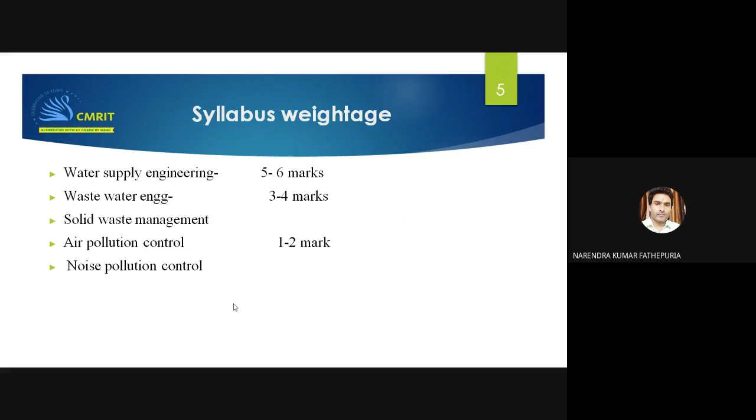As far as our environmental engineering syllabus is concerned, we will be having water supply engineering containing 5 to 6 marks, wastewater engineering 3 to 4 marks, solid waste management, air pollution control, and noise pollution control will contain 1 to 2 marks.

Okay, this is your environmental engineering syllabus. Water and wastewater quality treatment, basics of water quality standards, physical, chemical, biological parameters. In the last series, we discussed the physical, chemical, and biological characteristics of water and wastewater, and that portion we completed last time. We have also done the basic water treatment plants or unit operations. So I will now be moving to the unit operations and treatment part mainly.

So your pollution parts and municipal solid waste part doesn't have that much weightage, but 1 to 2 marks question they can ask. So this I will talk about later.

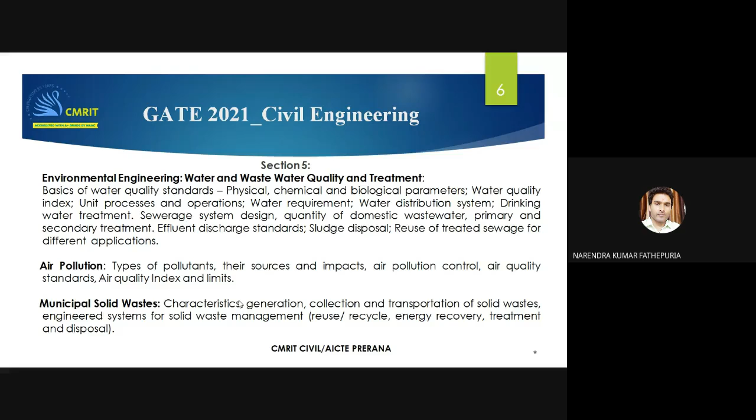In the last lectures, if you have seen the PPT, we completed the biological characteristics in which biochemical oxygen demand we wound up last time. I'll just quickly go over BOD because some portion is remaining, then we'll move to our treatment part.

Dissolved oxygen in wastewater for the oxidation of both inorganic and organic matters - demand of oxygen is expressed in two ways, sometimes total organic carbons, biochemical oxygen demand and chemical oxygen demand. And the third one is the total oxygen demand also.

BOD is the measure of the oxygen required to oxidize the organic matter present in a sample through the action of microorganisms contained in a sample of wastewater - the most widely used parameter of organic pollution for both surface and wastewater. So the strength of the sewage will be defined through the BOD only. We can say it's the oxygen required for the microorganism to carry out the biological decomposition of dissolved solids or organic matter in the wastewater under aerobic conditions at a standard temperature.

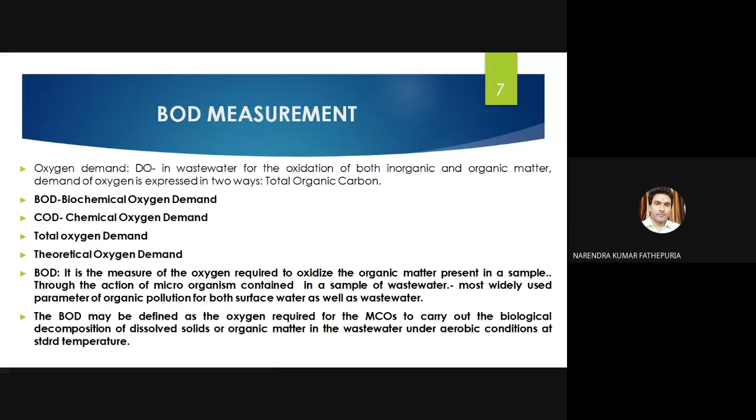The BOD test that we do in laboratory has the unit mg per liter, ppm. The test for biochemical oxygen demand is a procedure that measures the oxygen consumed by bacteria from the decomposition of organic matter. If I'm talking about BOD, we are talking about only the organic matter decomposition - how much oxygen is required to decompose the organic matter completely in an incubation period of 5 days and 20 degrees Celsius temperature. That demand is called BOD.

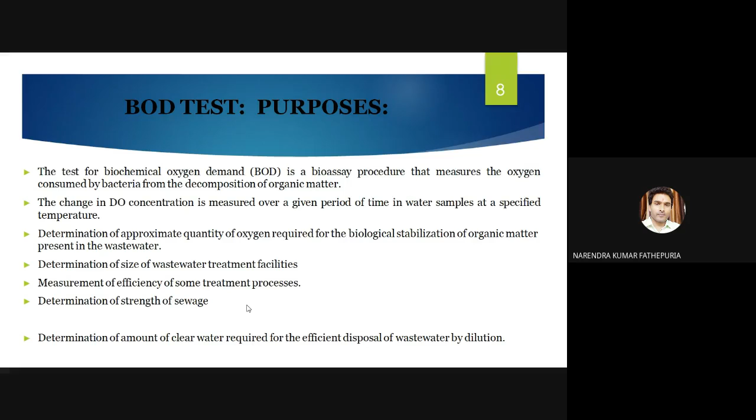Change in DO concentration is measured over a given period of time in a water sample at a specified temperature, to determine the approximate quantity of oxygen required for the biological stabilization of organic matter present in the wastewater. These are the main purposes for the BOD test: determination of the size of wastewater treatment facilities, measurement of efficiency of treatment processes, determination of the strength of sewage, and determination of the amount of clear water required for efficient disposal of wastewater by dilution.

So there is the first stage BOD demand and second stage BOD demand. Decomposition of organic matter takes place in two stages actually. In the first stage demand, only the carbonaceous matter will decompose, biodegrade. In the second stage demand, the nitrogenous matter undergoes nitrification. So we can say there is carbonaceous matter as well as nitrogenous matter present as organic matter in wastewater - first the carbonaceous matter decomposes, and then the nitrogenous matter decomposes.

That's why we call it first stage demand as well as second stage demand. There are some tests for it. The test consists of keeping the sample of wastewater in contact with a definite air or oxygen in a specially prepared vessel. BOD is then measured manometrically.

If you have done a BOD test in your environmental engineering laboratory, they check the 5 days dissolved oxygen content. They put a sample for 5 days in an incubator at 20 degrees Celsius temperature, then take out the sample and measure the dissolved oxygen. So dissolved oxygen after 5 days and dissolved oxygen initially, what is the difference, multiply with the dilution factor. Dilution factor: how much sample you dilute with distilled water. This is called the dilution factor.

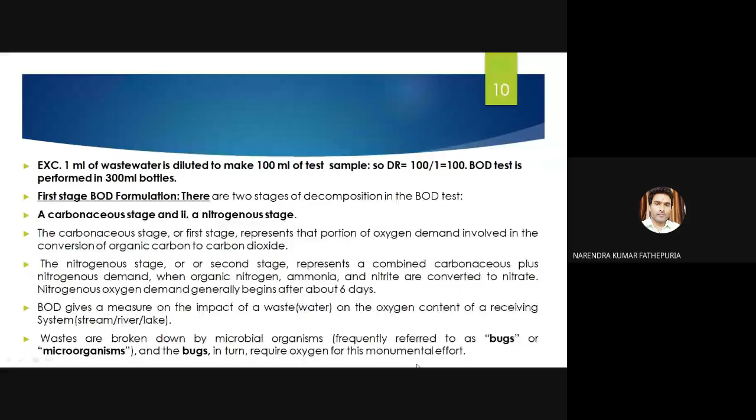So there is the rate of deoxygenation and rate of reoxygenation that we have. If you recall in sewage wastewater engineering, the self-purification methods, we were talking about the reoxygenation rate as well as the deoxygenation rate. The same concept applies here also. So at a given temperature, the rate at which the BOD is satisfied at any time is called the rate of deoxygenation, which may be assumed to be directly proportional to the amount of organic matter present in sewage.

So we can write dLT by dt is equal to minus K LT. K is the rate constant of deoxygenation. LT is the amount of first stage BOD remaining in the sample at any time t, in mg per liter. K is the rate constant of oxidation of organic matter per day. T is time in days.

Integrating between t equal to 0 and t equal to t, you get this parent equation that we used last time: LT divided by L naught is equal to e to the power minus kt. You can write it as LT is equal to L naught into e to the power minus kt. This is the same parent equation we used in self-purification.

You can derive it with the first order integration with the limit t equal to 0 to t equal to t. And then for the k constant, if you convert it into log base 10 form instead of minus kt natural logarithm, you have to divide this by 2.303, the basic conversion factor for log 10 to exponential form.

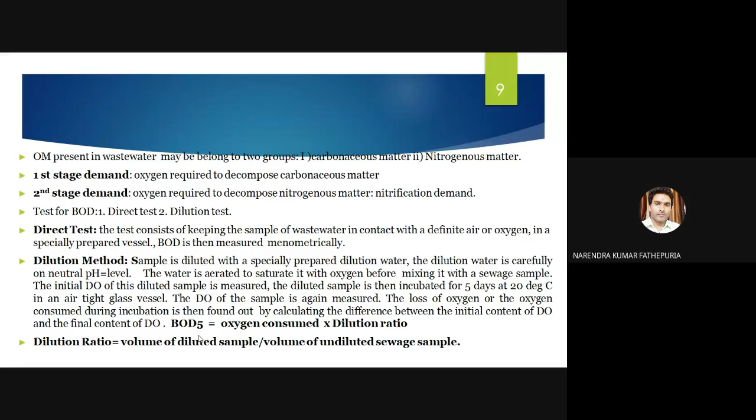If they want the LT value, the BOD after t days, so you have to multiply initial BOD with 1, multiply with 10 to the power minus kt or e to the power minus kt, you can write it. Okay, this equation.

And then k dash to k, if you want to get the ratio, k will be k dash divided by 2.303. Okay, if it is an exponential term, then you have to put it, this k value will be given generally, the oxidation deoxygenation constant value. If it is not given, then you can convert it.

So depending on how you are going to apply this formula, whether it's in the 10 form or maybe in an exponential form. Suppose if you want to calculate the 5 days BOD, so you write Y5, initial BOD minus BOD after 5 days, then deficit you can calculate it.

So ultimate BOD, the ultimate first stage BOD, by putting t equal to infinity. If you put t value as infinite, then you will get the ultimate BOD that we generally call L naught. So ultimate BOD will be L naught into 1 minus 10 to the power minus k multiplied by infinity, so it will be converted again into L naught. So ultimate BOD will be equivalent to the initial BOD only. Okay, so L naught, it will become L naught only.

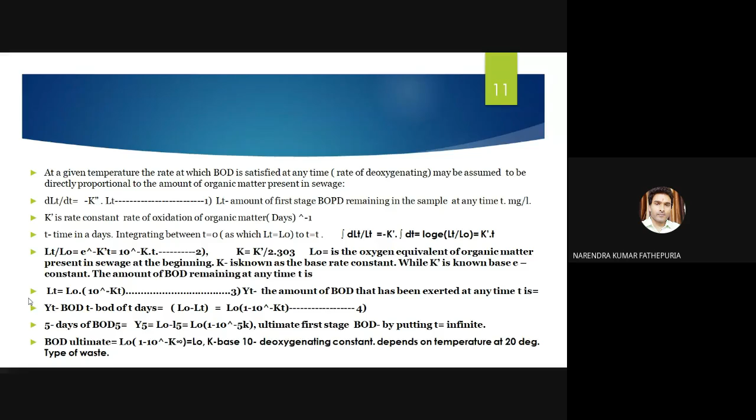So K base 10, deoxygenating constant, depends on the temperature at 20 degrees Celsius. That's all, okay. So ultimate BOD content will be equivalent to the initial BOD actually. So once you solve these BOD equations and questions, we'll be having some short questions on that. We can solve it and then you will understand. These are the three formulas you have to apply for BOD once you get questions related to BOD, maybe for wastewater, maybe for water supply.

Sometimes temperature also, in terms of temperature also we talk about the rate constant. So rate constant K also depends on KT, T is in subscript here. Okay, at any temperature T, temperature will be in degree Celsius. There is the Arrhenius relationship.

Kt is equal to K20, these are all in subscript, Kt is equal to K20 multiplied with theta to the power T minus 20 degrees C. That we have already studied in sewage treatment plant also, and self-purification methods, the same equation it is. If they are asking about a temperature gradient, then you have to apply this.

So Q, the theta value will be 1.056 for temperature range 20 to 30 degrees Celsius if the wastewater temperature is in that range. If it is other than 20 to 30, then you have to put this value 1.047. Theta ki value, 1.047 or maybe 1.056, you have to put it.

Okay, there is a second stage BOD. As I told you, in first stage BOD, carbonaceous matter is oxidized in the first stage of biochemical reaction, and then in the second stage of BOD, nitrogenous matter is oxidized. Though some of the autotrophic bacteria are capable of using oxygen to oxidize non-carbonaceous matters such as ammonia to nitrites and nitrates. What will happen in first stage BOD? CO2 will be forming, and in the second stage BOD, ammonia will be converted into nitrites and nitrates only. This process is called nitrification.

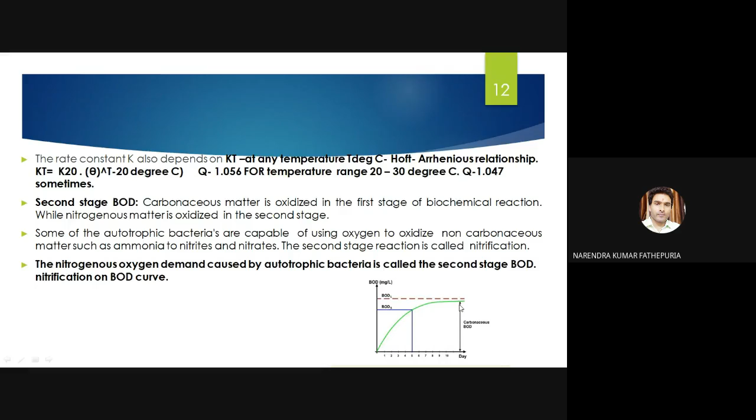To oxidize the carbonaceous matter, reaching up to this saturated level, so we can say this is the carbonaceous BOD. If it is nitrogenous matter, then we can say the second stage of BOD will start that time. So in the second stage, there is ammonia nitrogen, nitrification is taking place with respect to bacteria and other constraints, and then nitrite conversion is happening.

Bacteria will be producing its number, and then if you see the curve here - BOD and then days - primary oxygen demand and secondary oxygen demand. Till that point, carbonaceous BOD will take place. After that, the nitrogenous BOD, the second stage of BOD, will start. This is the carbonaceous stage from here to here, and if you extrapolate this, after this point, second stage BOD starts. Nitrogenous matter starts consuming here.

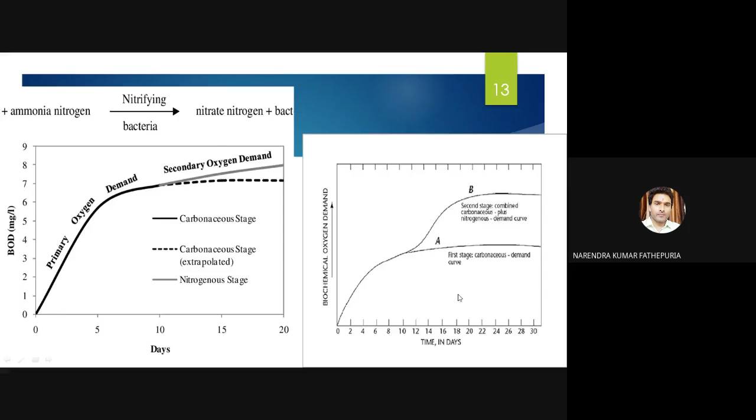Okay, that was the BOD explanation I wanted to give. I left it in an earlier class in detail, I couldn't explain it, that's why I took time for it. So we'll move to the next portion.

Now we'll move to unit operations in water and wastewater treatment. There are physical unit operations, chemical unit operations, and biological unit operations. In physical unit operations, the first and foremost thing is screening, second is aeration, and third is flow equalization or mixing. I'm talking in a combined way, wastewater as well as water treatment, municipal water. So first I will talk about the water treatment plant, then I will go to wastewater or sewage treatment plants. Most commonly, there are three types of processes: physical unit operations, chemical unit operations, and biological unit operations.

In physical unit operations, physical force is predominant, so screening will take place. There are some screens - bar screens, coarse screens, and fine screens - used for capturing debris and larger physical particles, and lots of physical impurities like sand and clay will be there, so we can capture it. Screening will not be required for water treatment, but for sewage water, screens are required. The intake structure screens have to be provided because the sewage water is thicker than the municipal water.

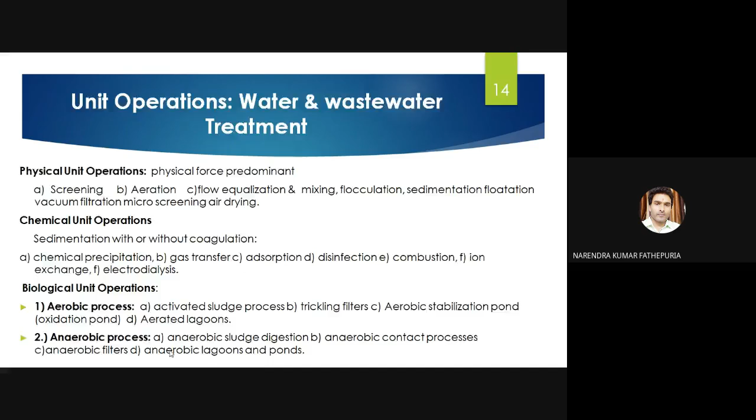These are the unit operations. One by one, we will study all the unit operations. Then we'll move to the water treatment plant, the drinking water treatment plant - what are the various processes in it, how to design a sedimentation tank, how to design aerators.

We'll do some subsequent numericals. First we'll study the concept, then we'll do the numericals one by one.

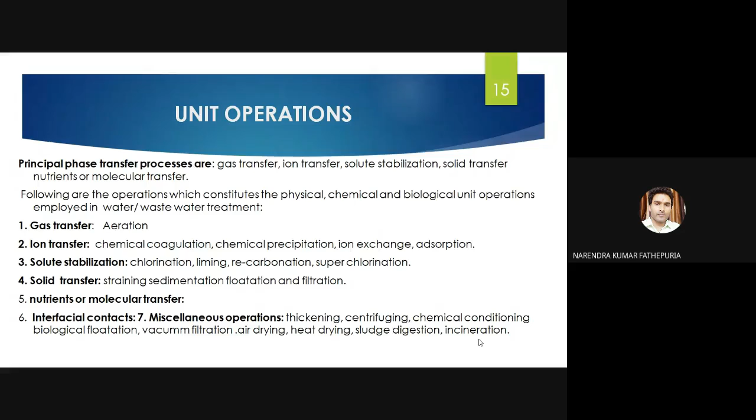Interfacial contacts, and the seventh one is the miscellaneous operations: thickening, centrifuging, chemical conditioning, biological flotation, vacuum filtration, air drying, heat drying operations, sludge digestion, and incineration. So these are all the processes which will take place in water treatment and wastewater treatment.

Now we'll talk about water treatment plants, how they work for surface water treatment as well as groundwater treatment, and what unit operations are applicable. This is easy because we have a certain time limit so I'll be a little fast, but it's kind of revision for you since you have already studied this, so don't panic.

Let's start from suppose we have a surface water body. We have a main source of water through the surface like lake and water stream. There will be a dam where water is coming through the intake structures, all the conduits and pipe network, and there will be complete intake structures with intermediate pumping stations also sometimes.

The surface water quality characteristics are different from the groundwater quality characteristics, so based on this you have to change the unit operation. As I told you, water treatment will be decided based on quality characteristics only. So for surface water, you collect the sample, test the physical, chemical, and biological characteristics, and based on this you can propose the treatment.

So generally, if it is a surface water body, what will be the unit operations you have to provide? Number first is the raw water - you have to directly send it for plain sedimentation without coagulation, so suspended particles can be captured in the sedimentation process.

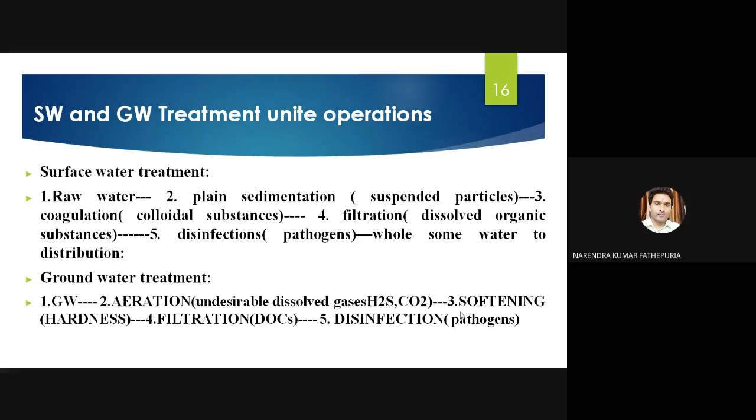If the major portion is permanent hardness, you have to provide methods for permanent hardness removal; otherwise, if it's temporary hardness, you can simply remove it. Then finally, we go for filtration, using slow sand filtration or rapid sand filtration beds, which remove colloidal solids and capture some bacterial components too. Then finally, we go for disinfection, where pathogens, bacteria, and microorganisms are removed, and the water is ready for drinking. So these are the unit operations for surface water and groundwater treatment.

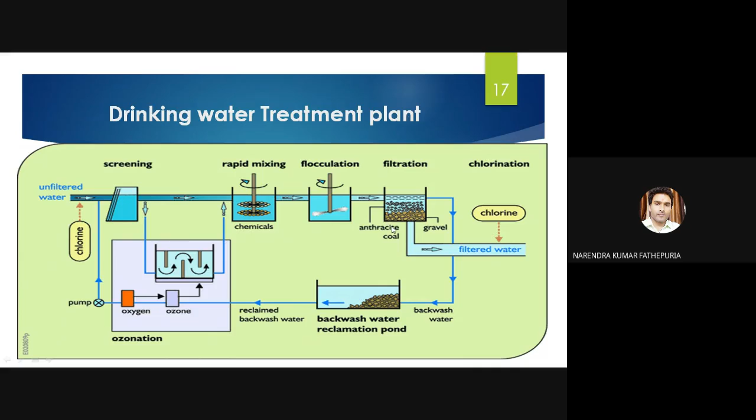Through the chlorination, they are again going for the ozonation process - sometimes it is required, sometimes it is not. This is the wastewater coming out from the cleaning operations of the filter, and then you are treating it again, supplying water from the screening operation, from the starting of the operation only - screening, rapid mixing, and all that. So it's a kind of recirculation, reclaiming wastewater.

Drinking water treatment is another case. We'll start the process the same way, but there's a clearer visualization so you will understand it.

We start from the pre-chlorination, then aeration, then the coagulant mixing chamber, which is called the flash mixing chamber. Here flocculators and motor-operated stirrers mix the coagulant in the water at a uniform concentration.

After that, there will be a clariflocculator, which has paddle-operated scrapers that rotate. A motor is attached, and there is a pathway on top so a man can go up there, and if problems come up in the motor or the mechanical structure, we can repair it. These scrapers have rubber pads.

Is the PPT not visible? It is visible. Oh, now it's not visible, sir. Just a minute, it will come. If my voice is not coming sometimes, or if the PPT is not visible, please let me know because I made it full screen and I cannot see the chat box now. Please let me know. Can you see the PPT now? No, sir. No? Just a minute, try and hide this again. Yeah, okay it's coming now.

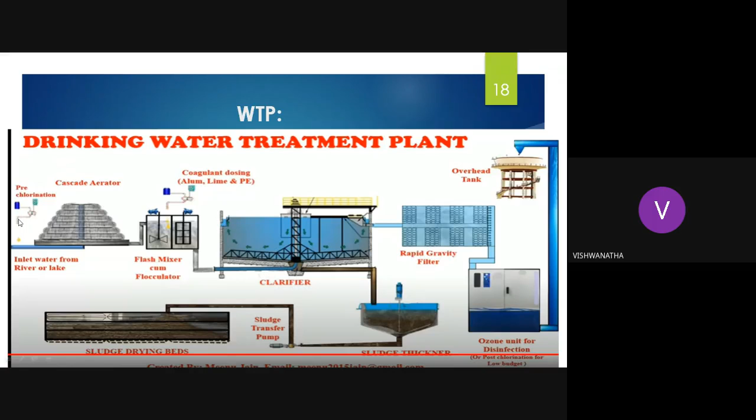Here the paddle mechanism, scrapers are provided because once the coagulation and flocculation process takes place, all the sedimented particles and suspended solids will stick to the walls, the interior wall of this surface. It can be circular or rectangular type, but most cases use a circular type of clariflocculator.

So on this interior surface, I need to clean these walls. I cannot do it manually, and I cannot send a person again and again - this is not safe because it's drinking water, so we don't want contamination. So this mechanical arrangement has to be there, and these mechanical scrapers have rubber pads.

It keeps rotating because the driving force is a motor running on AC current, and the scrapers take away all the suspended and colloidal particles that stick to the wall. Finally, the heavy gravity-settled particles settle down at the bottom in the sludge tank. A sludge tank is also incorporated with it, and finally the sludge is separated out.

Then sludge treatment we have to do. Sludge is collected here, then transferred through a pump because it's very thick, so pumping is required. There is a sludge thickening tank and sludge drying bed where the sludge treatment is done. That is the other part. Then sludge has to be treated, and then you can use it for manure operations and as a natural fertilizer.

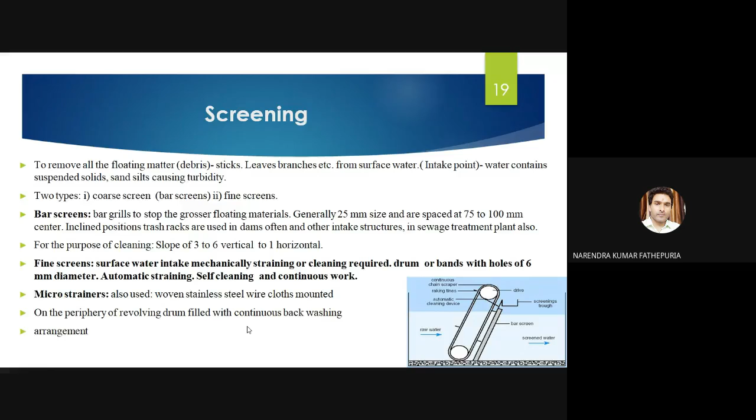These are the mechanical screens in a sewage treatment plant. You must have seen them somewhere in a drainage system. So mechanical cleaning bar screens use a pulley chain mechanism with a gearbox attached, so the RPM is controlled and it keeps rotating and toppling. This is a chain-driven screen, and this is a continuous belt screen, with a conveyor kind of mechanism that automatically cleans the devices.

Now we'll come to aeration. Aeration is a very important phenomenon in both water supply and sewage water treatment. It's a process of gas transfer, as I told you earlier. The aim of aeration is to create extensive, self-cleansing, self-renewing interfaces between air and water, bringing water and air into close contact to remove dissolved gases such as carbon dioxide, and to oxidize dissolved metals such as iron and manganese.

The objectives are clear: it removes taste and bad odor caused by gases from organic decomposition, increases the dissolved oxygen content of water, removes hydrogen sulfide and CO2, and decreases the CO2 content of the water, reducing corrosiveness and raising its pH value. So there are various advantages of the aeration process. It helps in chemical precipitation, it helps in physical sedimentation also, and prepares the water for the next process.

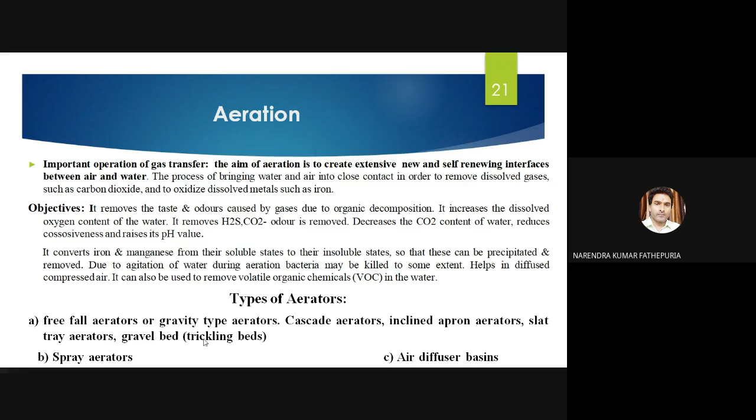Aerators are divided into three types basically. One is the free fall aerators or gravity type of aerators, in which cascade aerators come into the picture, inclined apron aerators, slat tray aerators, and gravel bed aerators. Trickling beds also come into the free fall aerator condition. All these types come under gravity type aerators. Second is the spray aerators, and third is the air diffuser basin.

So, what are the factors affecting aeration? Change in concentration with respect to time - this is the common equation, dC by dt equals Kg into (Cs minus Ct), the rate of gas absorption. Cs and Ct are the saturation concentration of gas in water at a given temperature. Ct is the concentration at time T, and Kg is the rate constant of gas absorption. The rate of gas absorption, Kg, is proportional to area divided by volume, the area of interface per unit volume.

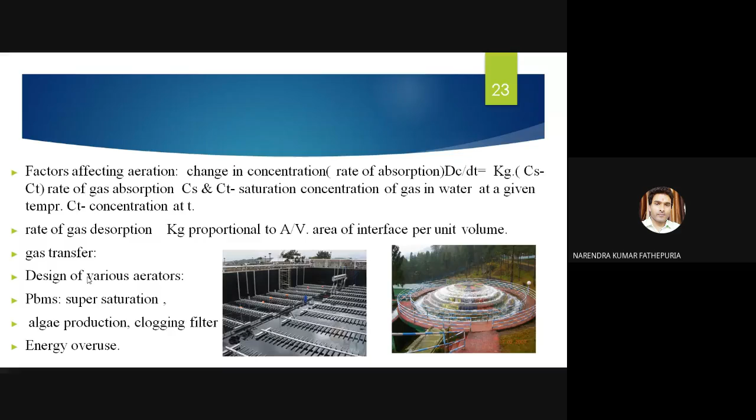There are designs of various aerators. The problems with aerators are supersaturation, algae production, clogging of filters sometimes, and energy overuse, because energy is required for the pumping. So this is all about aeration, that is enough for it. They don't ask questions on aerators, so I have not covered it in detail.

Sedimentation is very important, so moving on to the sedimentation part. Sedimentation is achieved in two phases. One is plain sedimentation, second is sedimentation with coagulation, sometimes we call it clarification. We'll talk about primary sedimentation here.

It is the first unit operation to capture suspended particles from water, removing suspended solid particles by gravity settling. Sedimentation tanks are designed to reduce the velocity of flow of water so as to permit suspended solids to settle out of the water by gravity.

And what is plain sedimentation? When impurities are separated from the suspended fluid by the action of natural forces alone - in most cases gravitational forces - and then natural aggregation of the settling particles, the operation is called plain sedimentation. So generally, through gravity settlement, all the heavy particles will settle down at the bottom of the tank, and then we can separate it out as sludge.

Plain sedimentation is not too effective because the colloidal substances cannot be removed from the plain sedimentation process. So to remove the colloidal substances, we need to go for coagulation, that is called chemical coagulation. That's why coagulant is added. So sediment with coagulant is more effective than the plain sedimentation process, and we call it clarification.

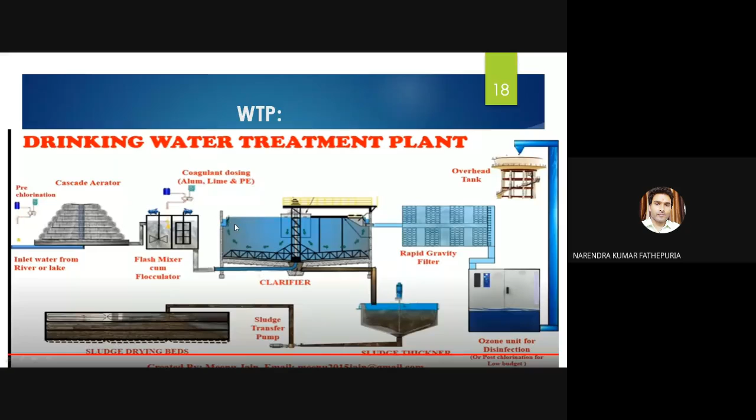So there are two processes. We'll talk about all those things in detail later on.

Now, discrete particles: a particle that does not alter its shape, size and weight while settling or rising in water is known as a discrete particle.

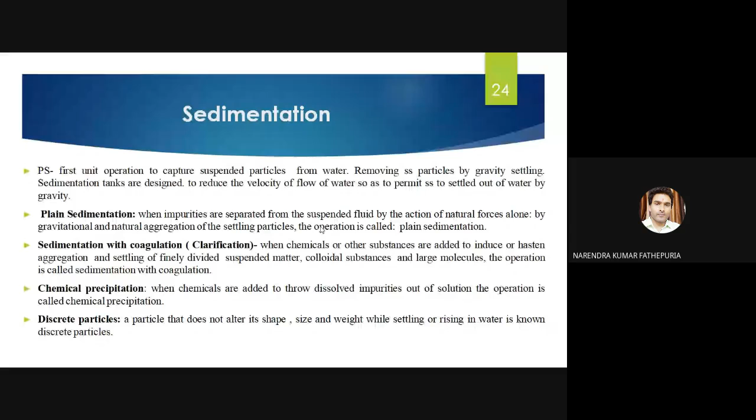Once we go for the zone of settling, there are phases of settling, phases of sedimentation: discrete particle settling zone 1, zone 2, settling type 1, type 2, type 3 and type 4, as you studied in water supply and treatment engineering. So you understand what kind of impurities will be removed at what stage, what type. In type 1, what kind of impurities are removed, in type 2 what kind. This process goes stepwise, the coagulation process.

So these are the types of settling. Particles may settle out of a suspension in four ways, depending on the concentration of the suspension.

Type 1 is called discrete settling, where discrete particles settle down. Type 2 is called hindered settling. Type 3 is called zone settling. Type 4 is called compression settling. I will talk later about all these in detail, but just remember here that these are the four types of settling.

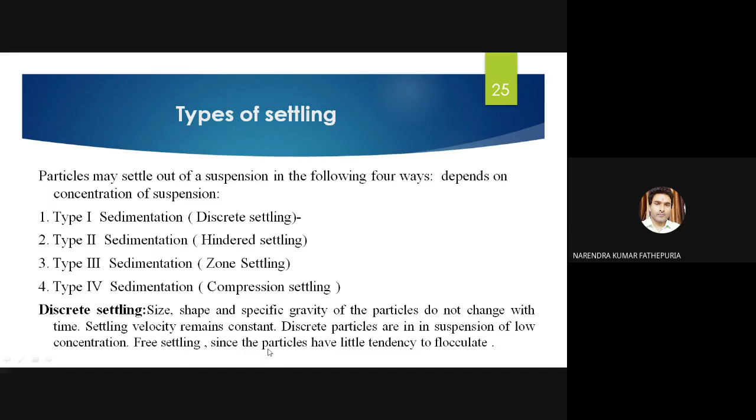As I told you, discrete particles are in suspension of low concentration, free settling, and the particles have little tendency to flocculate.

Now we also come to the settling of discrete particles.

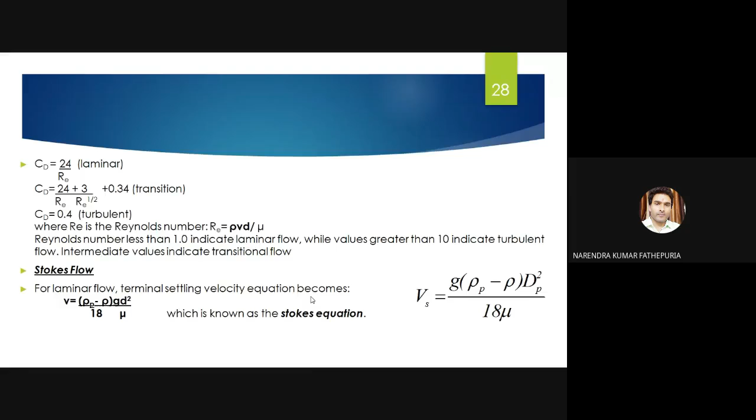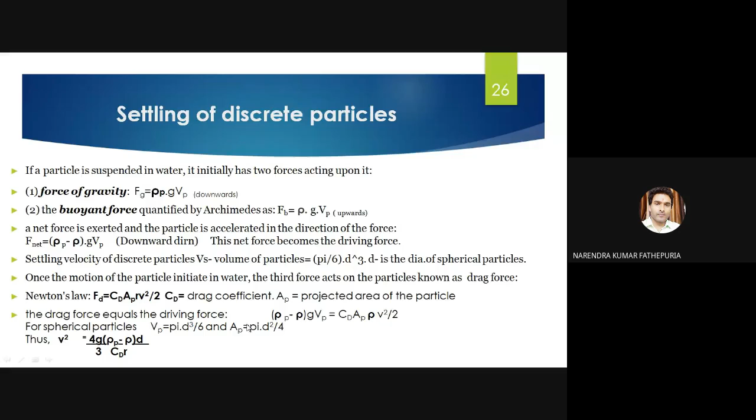Volume of the particle is always d cubed, so that way you can get the area. If it's a spherical particle, then you have to go in that way. Most of the cases it's a spherical particle only.

Generally simple things they can ask, but because we are preparing for both, you must know that coagulation and sedimentation play a very important role in competitive exams. You have to know that thing.

Very simple question: finding the velocity of a 0.02 mm diameter particle with specific gravity S value of 2.65, settling from water. Coefficient of dynamic viscosity of water is given as 10 to the power minus 3 Pascal second. So we can directly ask for velocity, using the Stokes equation.

So you have to use this formula for this equation.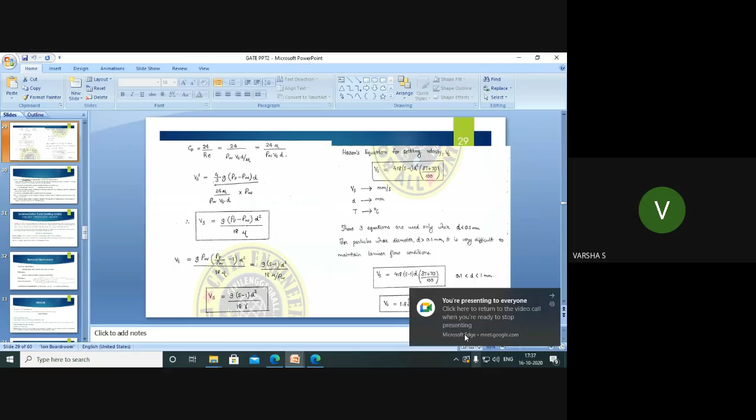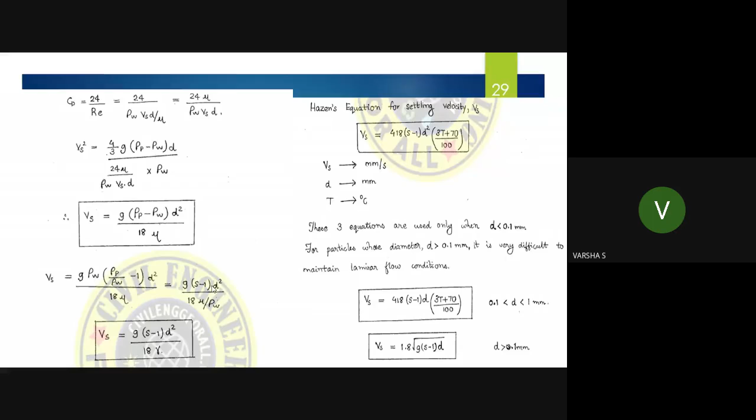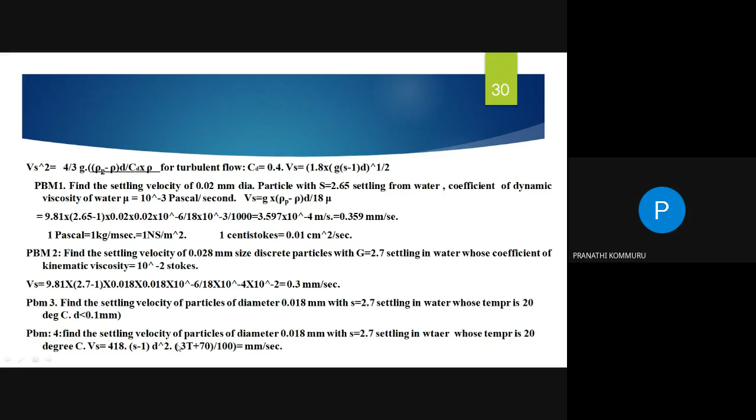Sir, we can't hear you. So you're not audible.

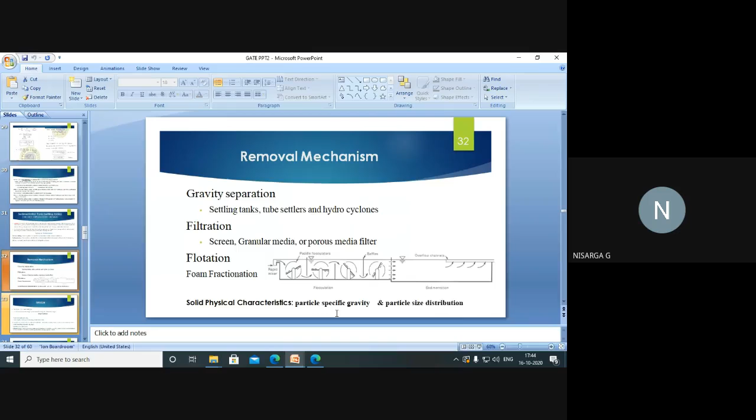So the removal mechanism of a sedimentation tank includes gravity separation and filtration, using screens, granular media, and porous media. There's also flotation, where fractions come on top and generate a flow. Here there's the overflow channel and the orifice attached, where rapid mixing happens. The paddle flocculator works in flash mixing, sometimes in the flocculation chamber itself, with baffles attached. We'll go into detail about it.

Solid physical characteristics include particle specific gravity and particle size distribution. We are dealing with both the particle size distribution as well as the particle specific gravity.

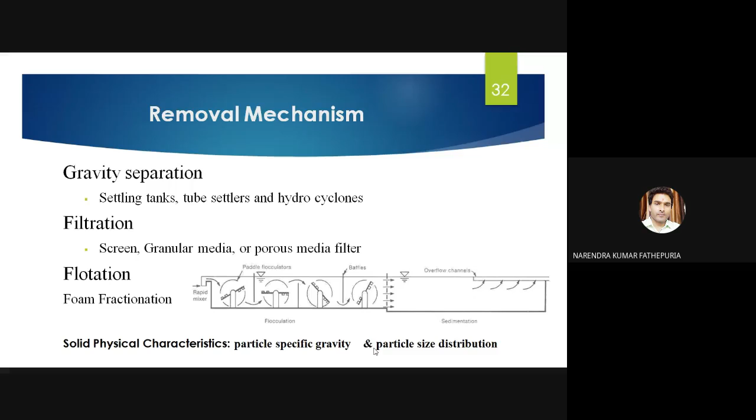If you see the design part of sedimentation, there are two types of tanks we will be talking about here. One is the fill and draw type, another is the continuous flow type. The continuous flow type again has two types: horizontal flow type and...

Major features include tank cross-sectional area, tank depth, and type of cleaning mechanism required. In specifying or designing basins for water and wastewater sedimentation tanks, three conditions are commonly used: solid handling capacity in kg per day, overflow rate in liter per minute per meter square, and detention time.

What happens in a sedimentation tank? You have to provide a detention time of at least 3 to 4 hours. If it is sewage, then more time you have to provide. If it's domestic drinking water in a municipal water treatment plant, then 2 to 4 hours detention time we have to provide. We have to hold the water for a particular duration so there's sufficient time for chemical precipitation and physical sedimentation. Basically, we are providing time for the chemical reactions, coagulation and flocculation.

Whatever level the floc generates on top, it takes time to come up. The sedimented particles will grow in size because of the chemical reactions, becoming heavier, and will settle down in the tank. This whole process takes time, which is why we provide a detention time. We cannot go in a continuous runoff.

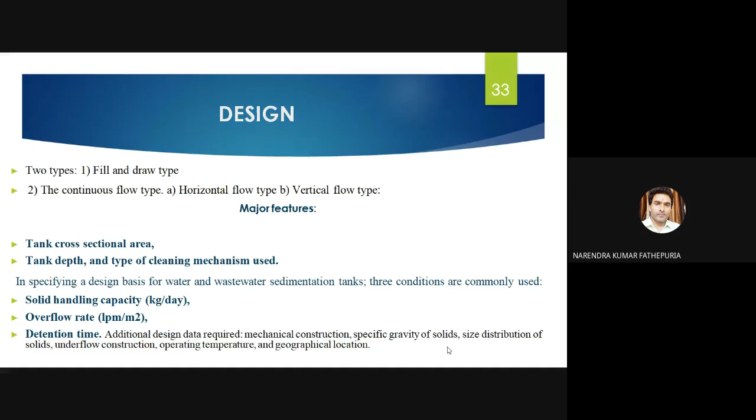Additional design data required includes mechanical construction, other than detention time. Mechanical scrapers are required. You have to study specific gravity of the solids, size distribution of solids, underflow constructions, the sludge tank and sludge overflow, and the sludge treatment tank, like sludge dryers and thickening operations. We have to provide various operations on the bottom of the tank, plus flow mechanism. Operating temperature and geographical location also must be studied while proposing a treatment unit.

This is a settling basin, a rectangular type of settling tank, showing turbulence, inlet and outlet. In the effective settling zone of the sedimentation tank, the top of the zone is called the settling zone, where chemical precipitation takes place, and the sludge zone where physical sedimentation of particles occurs. So sludge comes on the bottom, and precipitate lighter materials come on top, generating a flow.

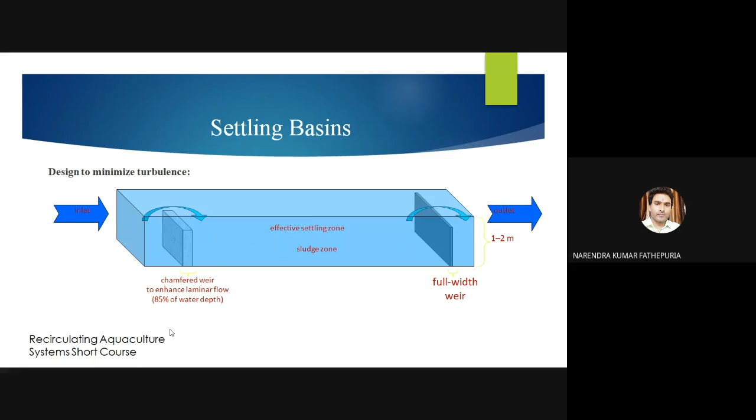We'll talk later about all the design concerns and criteria, how to design a sedimentation tank, and how to get the value of overflow rate and surface loading rate. This is the overflow rate. How do you get the overflow rate? You write this equation: overflow rate is equal to...

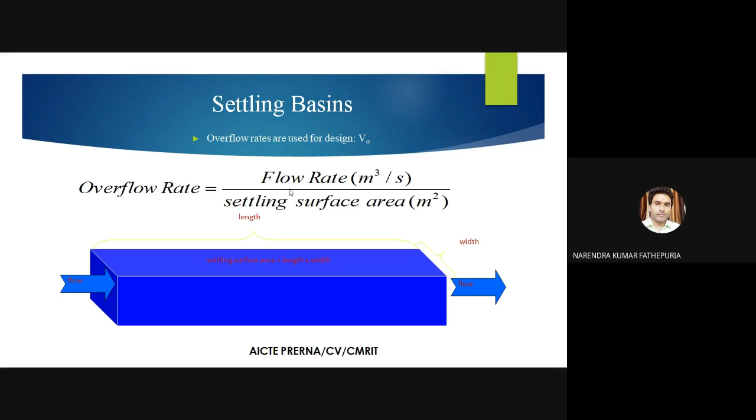The types of sedimentation basins, a tank or clarifiers. We have two models here. One is the basin model, where we check the horizontal velocity of the liquid flow. The mainly used models are rectangle shape or circular shape. Circular types and rectangular types of sedimentation tanks are most commonly used.

This is a settling velocity profile. This is the height of the chamber, suppose rectangle, and this is the settling velocity. Then you get the gradient for it - this is a slope gradient, which I'll use later. Just understand how the things are going on.

This is the side view of a tank. This is a settling zone - water is coming in here. There is an effluent weir, from here water is going towards the filtration chamber or filter unit. There's a perforated baffle here, and water is coming in - this is the inlet zone. This is the sludge zone, and this is the top of the settling zone.

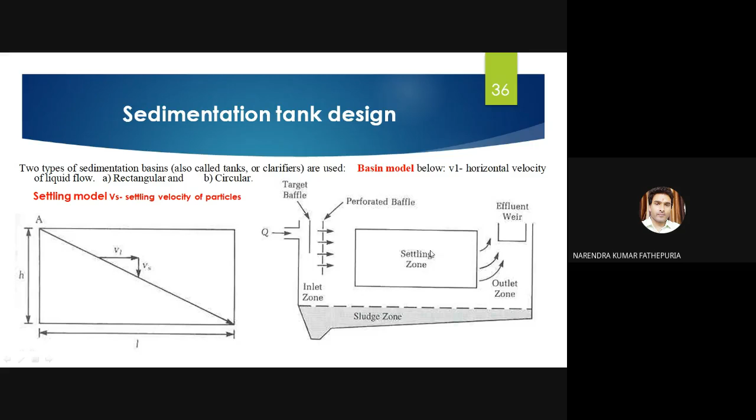Okay, so you will get more picture here. This is the circular basin. There are two types of tank we are talking about: circular types of sedimentation tank and rectangular type of sedimentation tank.

If I'm talking about the circular basins, this will be double layer. There are two constructed tanks actually - one is perforated, another one is the outer tank, and water will be circulated here. All the floc material will be circulating here. There are scrapers in the bottom, and from here a perforated pipe is there. Water comes through the pipe, joins from there, and then it comes up.

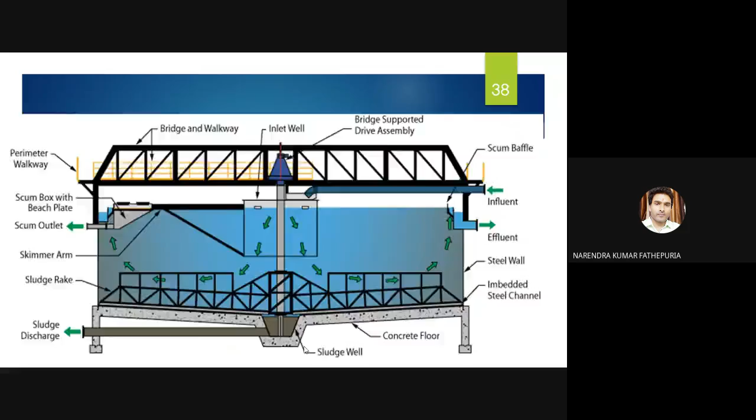We'll go next. There are the steps of sedimentation tank. If we have studied, we have a rectangle type, a circular type, and a hopper type.

So there are various civil structures, and based on the civil structures we have three types actually. This is a hopper type of sedimentation tank, and this is a rectangular clarifier. In the rectangle clarifier, the mechanism for removing these solids will be different. This is the circular type of basin that we have studied, and this is the second, rectangle. Third one is this hopper bottom upward flow type of sedimentation tank.

Depending on the application, sedimentation tank uses are very large everywhere - in industries, in sewage systems, everywhere it is useful. In this rectangle type of clarifier, the mechanism is similar, but they have used a chain pulley type of structure rather than scrapers, because scrapers cannot rotate - it's not a circular tank, it's a rectangle tank. So a different mechanism is used: a pulley rope mechanism, kind of chain pulley mechanism, with sprockets and driving gears, and it can remove the sludge and all the scum as well.

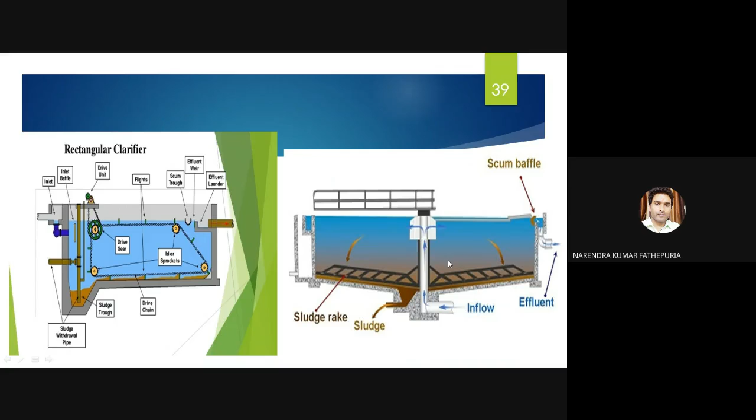This is the hopper type, hopper bottom upward flow type. Here this is a side view actually, so it will be in a hopper shape. Here the mechanism is also different. We have to clear the material deposited in the interior wall, and then the scum also we have to remove it.

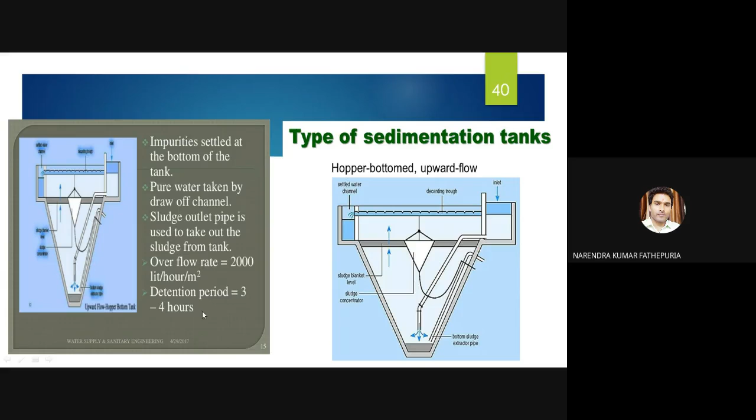So these are the specifications given for this. Pure water is taken by draw off channels. The sludge outlet pipe is used to take out the sludge from the tank. Overflow rate is generally taken as 2000 liters per hour per meter square. Detention time provided is 3 to 4 hours. Typical dimensions of the sedimentation tank are given here.

The circular basin diameter should be in this range. Typically, you can take it there. Depth, you can take it in that range. Bottom slope, you can provide 60 to 160.

In the Ministry of Urban Development, CPHEEO, as I told you, Central Public Health and Environmental Engineering Organisation, Ministry of Urban Development, we have water supply and treatment manuals, and we have sewage treatment manuals also. They keep revising the manuals. Through this, all the standardization, standard effluent discharge limits, standard design limits for rectangular and circular tanks, how much should be the diameter, what material you can use, how much overflow rate standards you can take - all the standards are given in it. We keep following these manuals only.

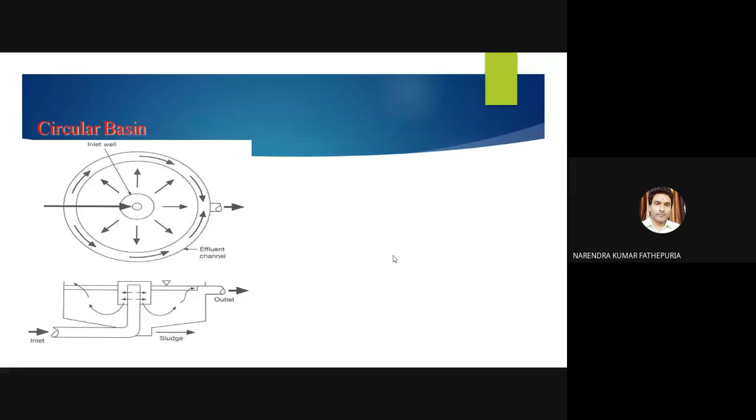So for the design parameters, the surface loading rate is the one important thing that we have to find out first. So Q by A, Q will be the volume with respect to time divided by the surface area, will give you the surface loading rate. SLR sometimes, or SOR, surface overflow rate - sometimes we call it the hydraulic loading rate or overflow rate. So discharge divided by area, flow rate divided by area. Area is the surface area only. As we had said, which surface area to take - this is the surface area to take, the top one, not everything.

So we call it surface overflow, surface flow rate sometimes. It is the volume of water applied in unit time per unit surface area. Here they have taken the plan area of the settling tank, so you have to be clear about that. So you can write the formula as: volume per time divided by surface area. So Q by A, you can write in short.

Surface overflow rate, SLR, you can get it like this. There is also the time of horizontal flow - we can write it first, this is the first number, there are 4 or 5 parameters. While you're designing a sedimentation tank, you can write it. So you write the surface overflow rate first - sometimes we call it SOR, SLR, all are similar names, so you don't need to get confused about it. If it is a circular tank, then pi by 4 d square. If it is a rectangular tank, the top surface area.

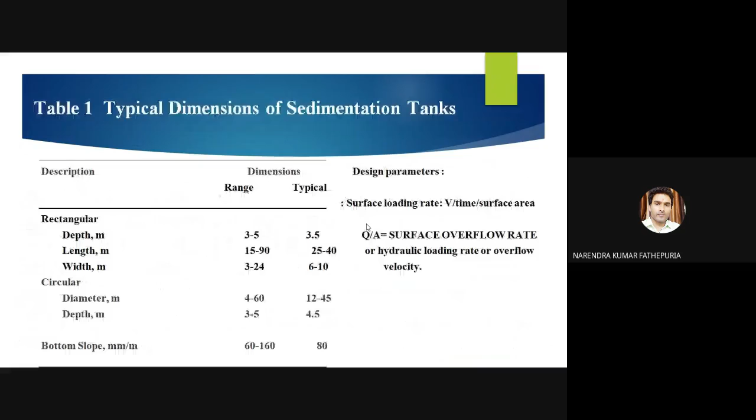Write this one down: for capturing the particles, Vs should be greater than V naught. If Vs is greater than V naught, particles are captured. If Vs is less than V naught, particles escape.

Number three is the detention time or hydraulic retention time. Don't get confused, HRT and detention time are the same thing. It's the average theoretical time taken by water to travel from inlet of the settling basin. Detention time for water supply sedimentation tank without coagulation is generally 4 to 8 hours. If you are adding coagulant, retention time will reduce.

So, volume of settling tank - how will you calculate it? Flow rate multiplied with detention time. Q into dt gives you the value of volume of detention time. Write down all these things: 1, 2, 3, and 4.

Fourth one is the flow through velocity. We are right now designing a sedimentation tank, so these are the hydraulic parameters you have to note down. Flow through velocity for the horizontal flow velocity: for the rectangular settling tank, the V horizontal velocity will be equal to Q divided by cross-sectional area, Q divided by B into H.

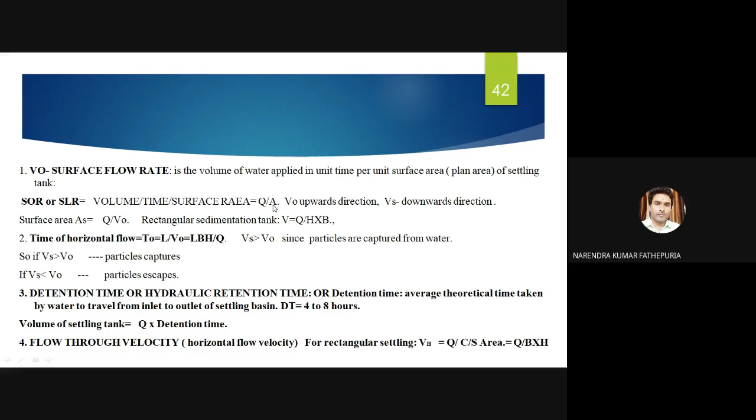And what was the surface overflow rate? Q divided by the rectangle area. What was the area for it? Surface area. Okay, so this is the thing.

So VH is the speed at which water travels from inlet to outlet of the settling tank, known as flow through velocity or velocity of flow. For the rectangular settling, Vh will be Q divided by cross sectional area, so Q by B into H. Equation number 1: if you want to find cross sectional area, it's Q divided by VH.

What VH value as a standard should you take? 0.2 to 0.9 meter per minute, you can take 0.3 meter per minute. Length of the settling basin you can define: length L is equal to VH into retention time. Note that down too.

Now we come to the weir loading rate, WLR, very important. What is weir loading rate? Amount of water overflow per unit length of the tank.

This is also Q divided by the length of the weir. So Q divided by length of the weir is B. So Q by B will give the weir loading rate for the rectangular tank. For the circular settling tank, it will be Q by pi d.

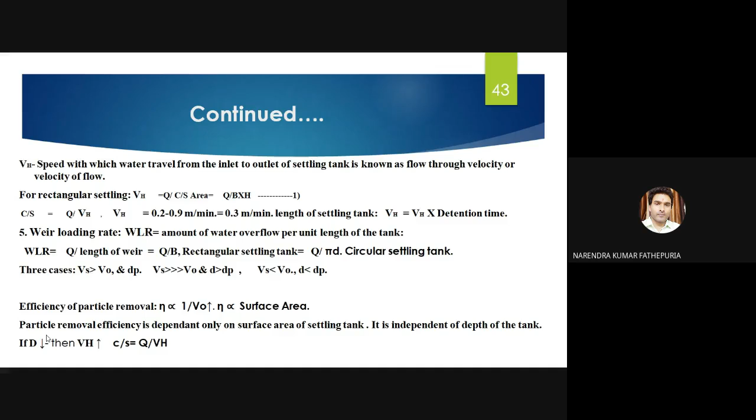These are the important things we have written down, these are the concepts. I will share this PPT to you, try to study in such a manner so it will be easy to revise. So the particle efficiency factor depends on this.

And now the overall efficiency of all the particles... divided by V naught. So we have reached the overall removal efficiency of this.

Sedimentation tank, rectangular and circular, we have discussed. Surface area and SLR we have discussed. Settling velocity, value of the settling tank, discussed. WLR we have discussed, Q divided by length of the weir - if it's a circular tank, Q divided by pi into D; if it's a rectangular tank, Q divided by B. You studied till that.

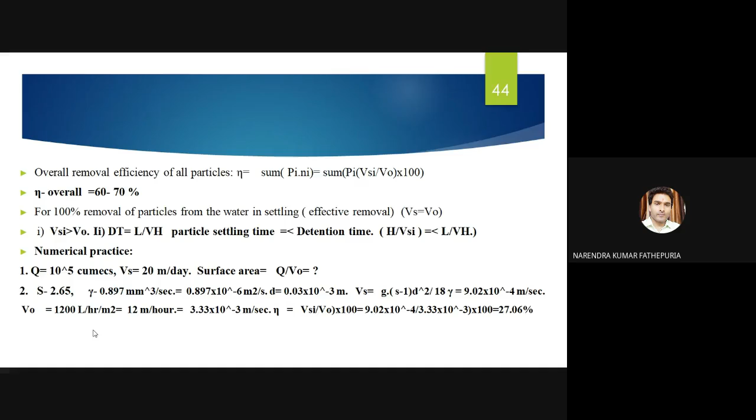I will read the question and you will understand. I will circulate these questions to you with the solutions, you just solve it, okay? It will be easy to understand. In 2 hours we cannot discuss everything, so still I have put in some effort so you can get the basic understanding of these questions.

Okay, so this equation we have discussed, this is the Stokes equation from earlier. And then if you want to get the settling velocity, that is V naught, you get it as height of the settling tank divided by the time, or finally the overflow rate, which you get as Q by A generally. And if you want to get the detention time, that is V upon Q, volume divided by flow rate.

So there is a question given here. The water treatment plant has a flow rate of 0.6 meter cube per second. The settling basin at the plant has an effective settling volume that is 20 meters long, 3 meters tall, and 6 meters wide. Will particles that have a settling velocity of 0.004 meter per second be completely removed? If not, what percentage of particles will be removed?

So what is given here? V naught is greater than Vs. Settling velocity and velocity of particles is given. So V naught is greater than Vs here.

How big would the basin need to be to remove 100% of the particles that have a settling velocity of 0.004 meter per second? If V naught is equal to Vs, then 100% removal efficiency will take place, right? So you just find out the V naught value first, Q divided by A, and area is 150, 25 meters long.

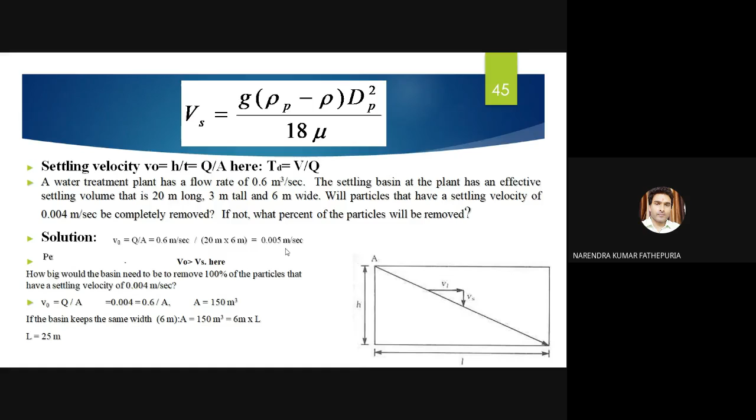6 into 3. What are we getting? B into H, right? Okay, then you just go through the PPT and we'll understand. I'm not wasting time. Here they have given V naught is equal to Q by A, 0.6 meter per second they have calculated, and 20 into 6, L into B. So percentage removal Vp divided by V naught into 100 they have calculated. Like this you can go for it.

Now there's coagulation, sedimentation aided with the coagulation. As I told you, all the impurities are negatively charged. There's a zeta potential value they have to calculate here. These impurities are colloidal matter, and if you add a coagulant like alum or ferrous sulfate and all that, then the chemical reactions will take place. So all the colloidal particles are negatively charged while traveling in the water due to the abrasion, wear and tear.

There is a Brownian motion, all the particles are in Brownian motion. Colloidal particles carry their charges on their surface. Most of the colloids are stable in water because of the charge they carry, so it is not easy to remove these colloidal substances. As I told about clarification, without going for plain sedimentation only, colloidal particles cannot be removed.

The coagulant neutralizes the negative protective charge on the colloidal particles and allows them to coagulate. The chemical reactions will take place. Colloidal particles cannot be captured in plain sedimentation. To remove the colloidal particles, an accelerated sedimentation process is employed. And this is the zeta potential here. Colloidal stability is measured in zeta potential.

So write this equation: 4 pi Q into D by capital D. Q is the charge on shear surface. Sometimes they ask a question on this zeta potential. So this is how chemical coagulation takes place if you are adding a coagulant. What are the chemical reactions? I will come to this diagram further, then you will understand more. First, write down what zeta potential is. This is the diagram for zeta potential.

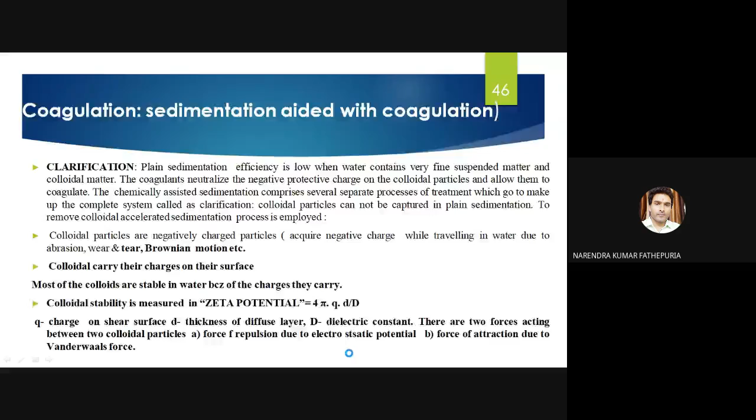Repulsive force, and then force of attraction, that is called the van der Waals force. Here it will be clear. You see there's a positive charge particle, negative charge colloidal substance. Positive, negative will make a zeta potential here, a Stern potential, zeta potential profile. There's a shear plane, and there are two forces, repulsive forces and attractive forces. Particles with negative surface charge. There's a diffuse layer, and like this, the breakdown will happen in the colloidal particles, and they will be removed from the water.

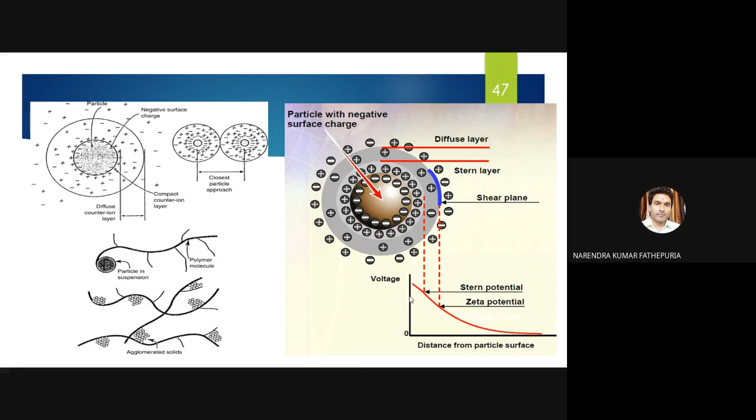How the impurities will stick, positive, negative will make the agglomerate. This process is called agglomeration. So this is the attractive energy force and there is a repulsive energy force. Electric repulsive and neutralization will take place finally. These are the van der Waals attraction, these are the repulsive force, and both will go in the direction. So force of attraction is proportional to 1 upon the distance between the particles.

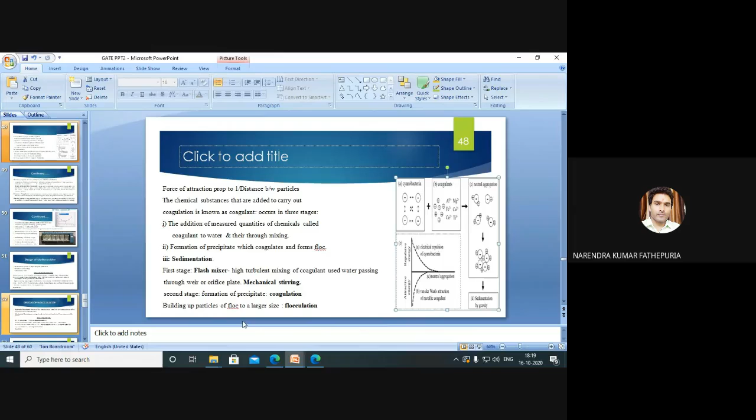The chemical substances that are added to carry out coagulation are known as the coagulant. The coagulation process occurs in 3 stages. One, the addition of a measured quantity of chemicals called coagulant to water, with thorough mixing done in the flash mixing chamber. Second is the formation of precipitate which coagulates and forms floc on the top - as I told you, this is the chemical precipitation. Third is the sedimentation, the physical sedimentation. The first stage is the flash mixing, where high turbulent mixing of the coagulant used, water passes through the weir and orifice plate.

First stage: sometimes mechanical stirring is also there. There are mechanical stirrers, and constant stirring operations happen, and we have to mix it in the flash mixing chamber. These coagulants should mix properly.

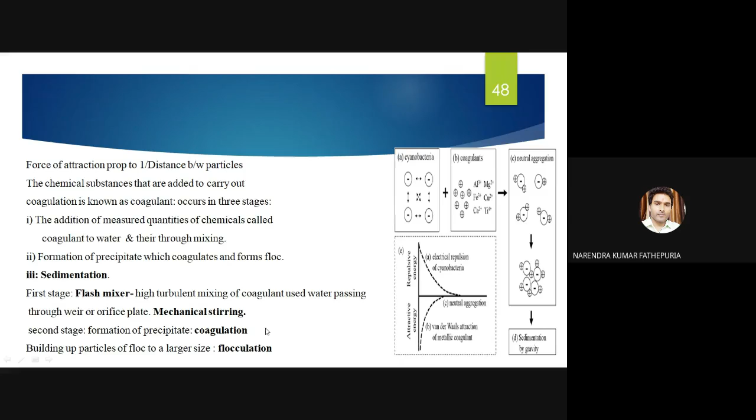In the second stage, the formation of the precipitate happens, the coagulant floc generation. The third stage is the building of the particles of flocs to a larger size, and either they can generate a floc on the top or they can sediment at the bottom of the tank.

After adding coagulation, the following mechanism occurs, that is colloidal stabilization: first, compression of the electronic double layer; second, adsorption or charge neutralization; third, sweep coagulation; entrapment in precipitation; and fourth, interparticle bridging.

That much knowledge is not required, but you must understand the common processes happening: chemical precipitation and physical sedimentation.

What type of impurities get removed through sedimentation added with coagulation? Animal and vegetable matters, phytoplankton, mineral matters, clay and other colloidal soils, organic coloring matters, partly in true solution and partly in colloidal form, bacteria and viruses, complex mixtures of colloidal and dissolved organic compounds derived from sewage and industrial effluent. These are the impurities removed through coagulant added with sedimentation process.

What are the common coagulants we use? Alum, aluminum sulfate, ferrous sulfate, ferric sulfate, ferric chloride, sodium aluminate, chlorinated copperas, lime soda, magnesium carbonate, and polyelectrolytes.

Polyelectrolytes work as a coagulant aid. It makes the process faster. If you are adding coagulant, the regular process takes time, so adding polyelectrolyte helps as a coagulant aid, like a catalyst. Sometimes in chemical reactions we use catalysts, no? The same way polyelectrolytes work.

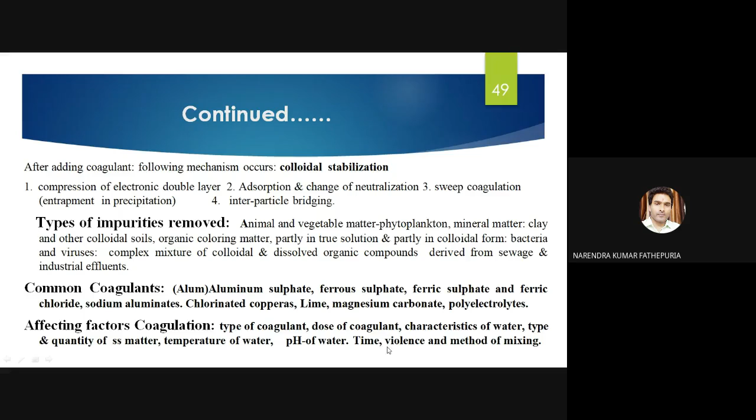Affecting factors of coagulation: the type of coagulant used, doses of coagulant, characteristics of water, type and quantity of suspended matter, temperature of the water, pH of the water, time, and method of mixing. These are the depending factors of coagulation.

This is coagulation - how you decide the coagulant doses in a laboratory. The coagulant doses are decided based on the jar test method. There is chemical conditioning, addition of chemical to the water. What doses, how many mg per liter you have to add, that you have to decide. So there is a jar test in your environmental engineering laboratory.

Flocculation is physical conditioning - growth of the particle. Coagulation is chemical conditioning. Sedimentation is settling of the flocculant. These basic terms you must understand. The jar test is required to find out the optimum dose of coagulant.

The minimum dose and maximum removal capacity you have to decide. There is rapid mixing and slow mixing of the stirrer. For rapid mixing, 1 to 3 minutes, you stir this coagulant in water at 100 to 120 RPM. Uniform blending is required for physical conditioning.

Physical conditioning means we are talking about flocculation. Slow mixing is 20 to 40 minutes at 1 to 3 RPM. Allow the floc so formed to settle down by keeping the contents of the jar quiet for a period of 30 minutes to 1 hour.

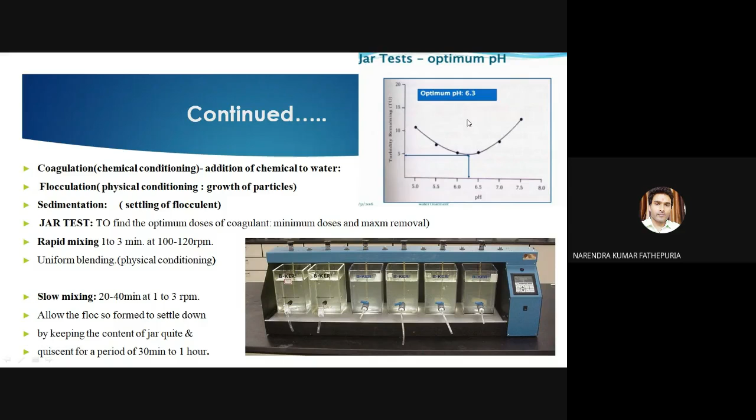Jar test, and this is the equation. The optimum dose is decided based on this graph: turbidity remaining versus pH level, and this gives the optimum dose. They decided the optimum pH is 6.3, and the dose will be decided at that point using the optimum curve.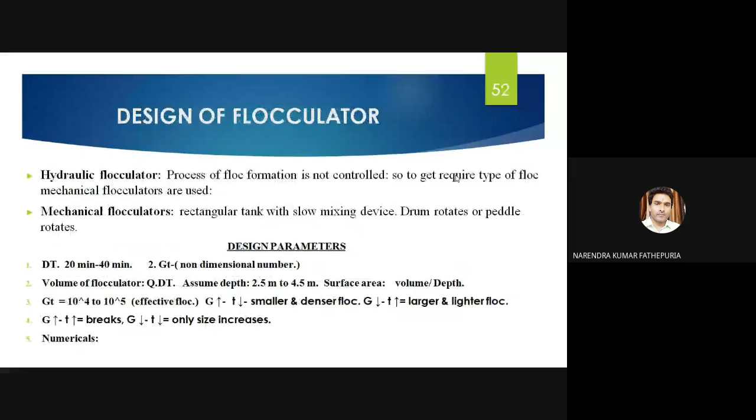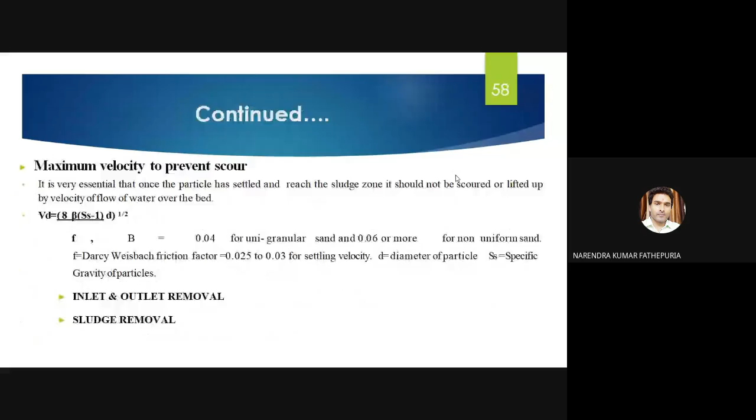This is the design of flocculators and the various parameters involved. We do not have time today; the next class will continue with these things. There's so much to study - the next class will proceed with it. We don't have time now.

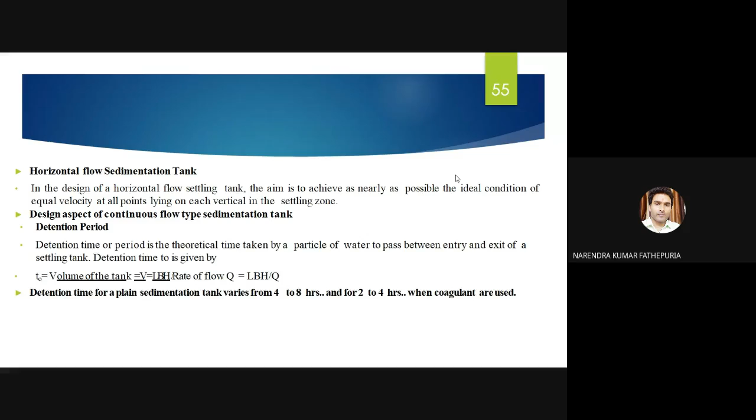After that, filtration and disinfection are required for water supply and treatment engineering, and that will be over. For the wastewater portion, I will talk about the unit operations for tertiary treatment and biological operations - that's all for that part, then water and wastewater engineering will be completed. Air pollution and solid waste, I will take one class sometime, then our portion will be completed.